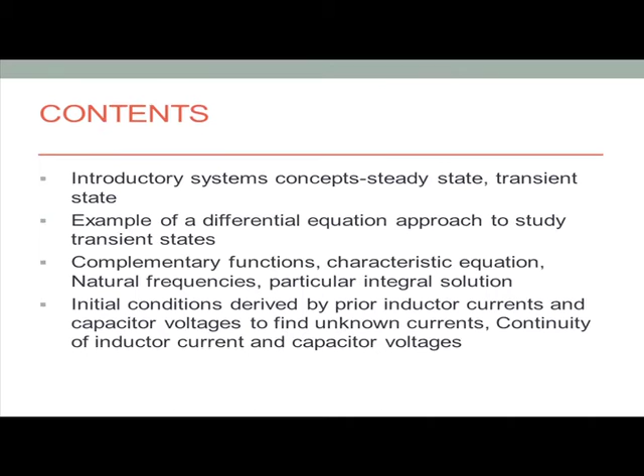After having familiarized ourselves with the different types of standard signals one has to deal with normally in system analysis, let us now introduce ourselves to some elementary system concepts which will be found useful later on in this course.

Generally, when we talk about the analysis of systems, we would like to assess the dynamic performance of the systems, and in this context it would be useful to remind ourselves what a steady state of a system means and what the transient state of a system means.

When the variables of a system or a network are either constant DC values or are regularly repeating periodic functions of time, then the system is said to be under steady state conditions.

Under sinusoidal circuit theory, you deal with systems under steady state conditions where all the voltages and currents are periodic functions of time which are sinusoidal in character. Similarly, in DC circuits you deal with steady state conditions when all the voltages and currents are constant.

So once again, the system is said to be under steady state when the signals characterizing the system are either constants or regular periodic functions of time.

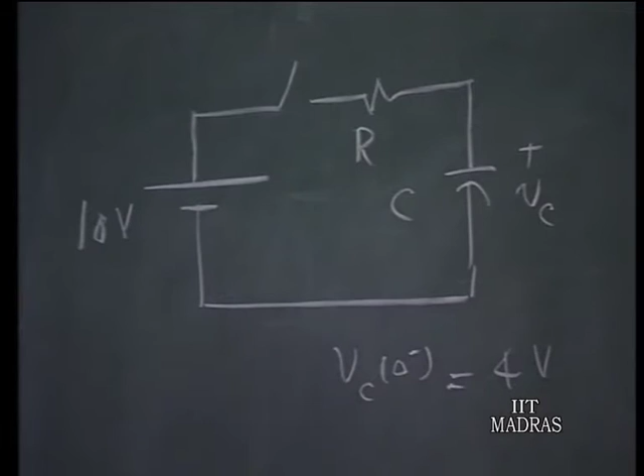Let me take an example to illustrate this idea. Suppose I have a 10 volts DC source connected to an RC circuit with an initial capacitor voltage of 4 volts, and I would like to find out how the capacitor voltage behaves for time t equals 0 onwards if the switch is closed at t equals 0.

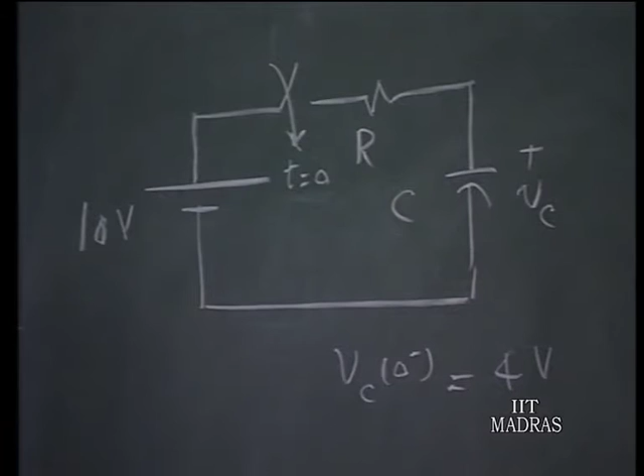Now, the capacitor voltage Vc to start with is 4 volts, ultimately it will reach a voltage of 10 volts, it gets charged to this 10 volts. Therefore, the steady state voltage of the capacitor is 10, that is the steady state voltage of the capacitor.

But at the time of closure of the switch, the capacitor voltage is 4 volts, and there is no reason for that voltage to change because there is a resistance here that absorbs any shock in between. This is 10 volts, this is 4 volts, and this 6 volts is dropped across the resistance. So initially the value of the capacitor voltage must remain as 4 volts.

Therefore, you have a transient term which is minus 6, and from your elementary knowledge of transient analysis there will be an exponential term e to the power of minus t over CR, which decays with time. Therefore, Vc of t is 10 minus 6 e to the power of minus t over CR. CR is the time constant of the circuit.

This is the steady state part, and this is the transient part.

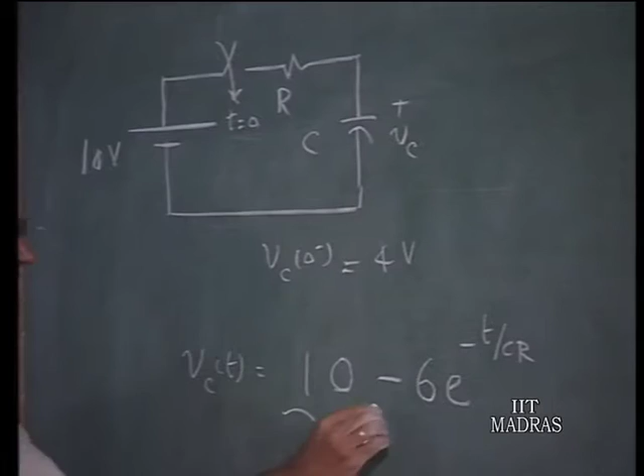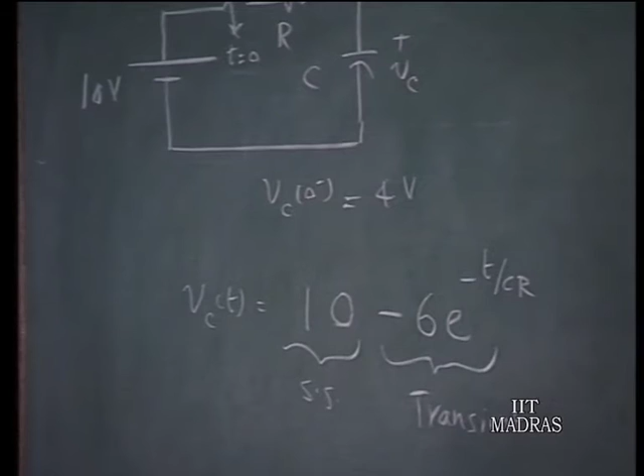So, in going from one steady state to another, from the 4 volt steady state to a 10 volt steady state, you have a transient arising. The capacitor voltage can be shown as this 10 volts, the new steady state Vc, originally it was 4 volts, and then you have a transient term which is an initial amplitude of minus 6 that decays like this. This is the transient component of the capacitor voltage.

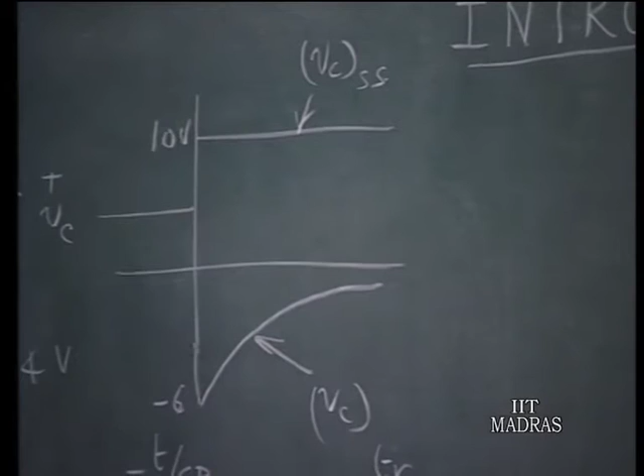The sum of these two will give rise to this curve. This is the actual capacitor voltage.

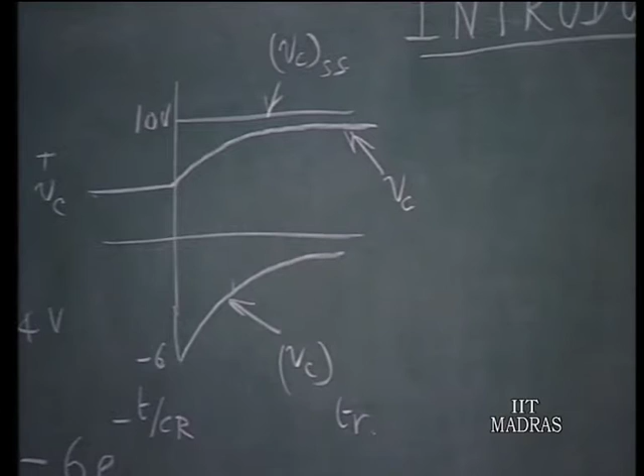So you recognize in this process a steady state value and the transient part, and the transient component arises because the old steady state does not match the new steady state, and therefore there is a transient which bridges this gap. In order to solve for these transients, you have different approaches available.

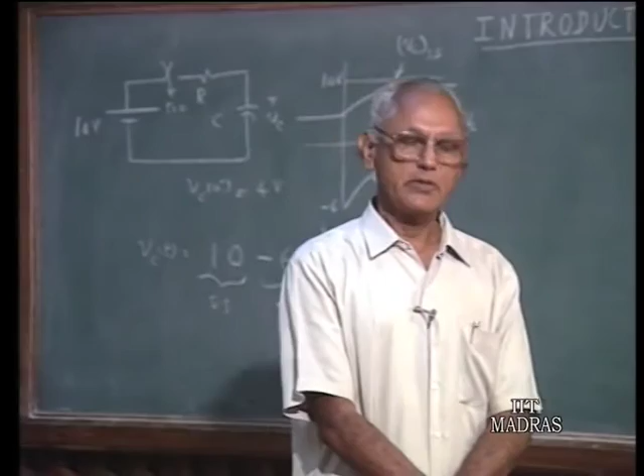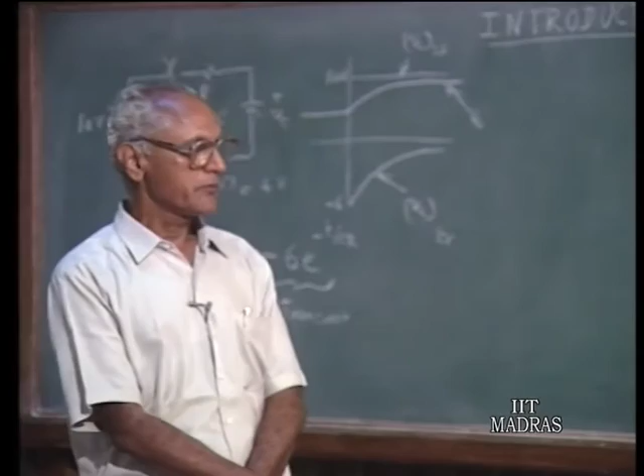The classical differential equation approach is the most fundamental method, but it is somewhat complicated. Nevertheless, since most of the equations of the network are written in terms of differential equations, it is a fundamental approach, and since you have studied differential equations in your mathematics courses, it would be convenient to see how this approach can be used to study transients in networks of this type.

We will illustrate and introduce this idea through an example, and later on show that some of the difficulties associated with solving transients through the differential equation approach can be overcome using operational methods like Laplace transform methods at a later point in the course. But to get a feel for the advantages of Laplace transforms, we must know what the difficulties are in the differential equation approach. So, let us take an example.

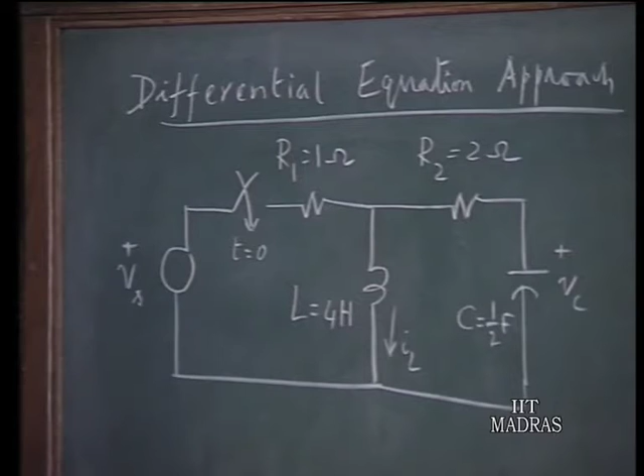Let us consider this particular circuit to illustrate the differential equation approach. We have an inductor and capacitor in the circuit, which provide the initial conditions necessary to solve the problem. Normally the initial conditions are given pertaining to the situation before closure of a switch. So let IL0 minus, before closure of the switch, be 0 amperes, and the capacitor voltage before closure of the switch is also 0.

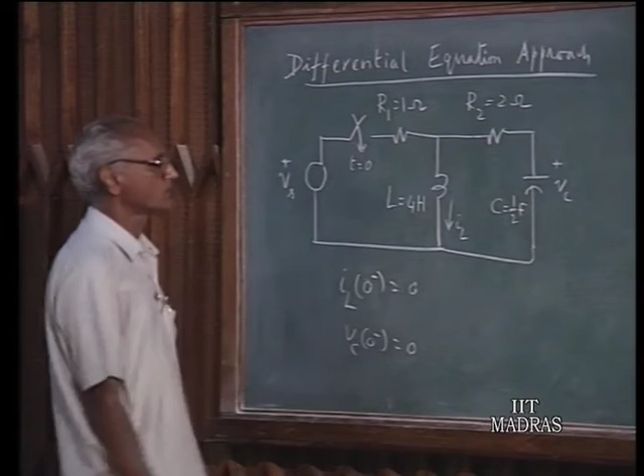And let us also say that the source voltage is 12 volts DC.

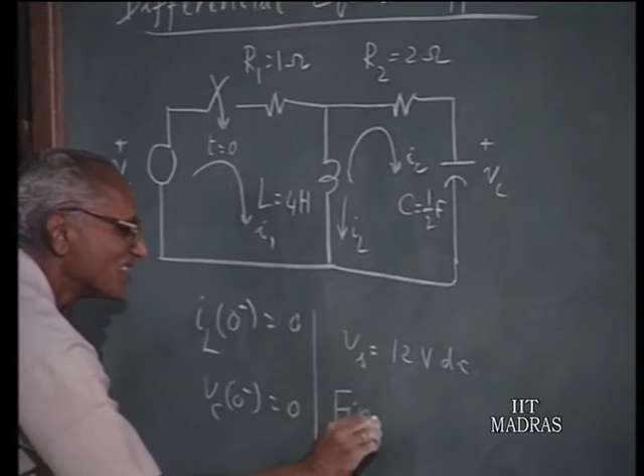To solve for this particular circuit, let us take the loop equation approach. We have two currents I1 and I2 in the two loops. We write down the differential equations pertaining to the two loop currents, and let us say that in this problem you are interested in finding I1 of t, for t greater than 0.

So this is the solution. Let me write down the differential equations for the two loops.

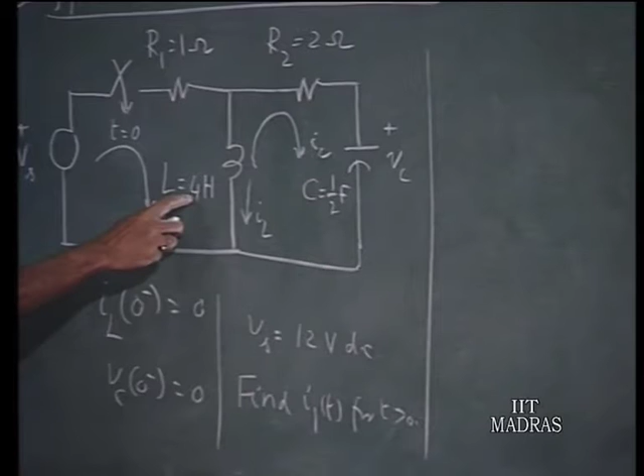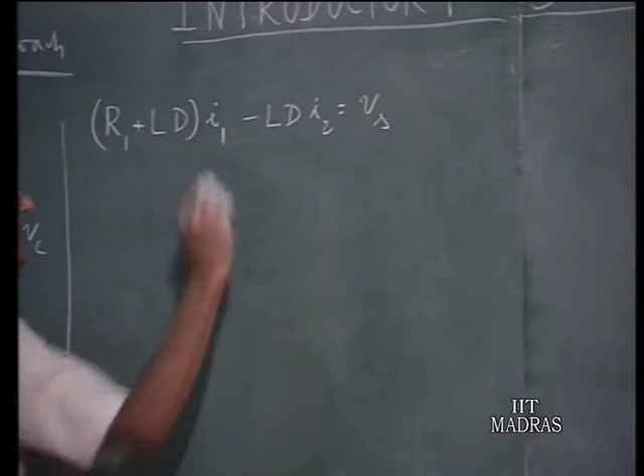For the first loop: R1 I1 plus L times d by dt of (I1 minus I2) must equal Vs. This can be written as (R1 plus LD) operating on I1, because the derivative operator D operating on I1 is di1 by dt, minus LD operating on I2 equals Vs. That is the first equation, where by definition D is d upon dt.

Similarly, D squared by definition is the second derivative of the particular quantity.

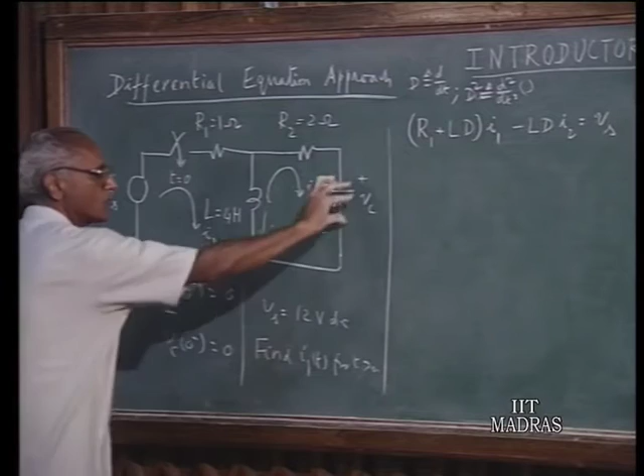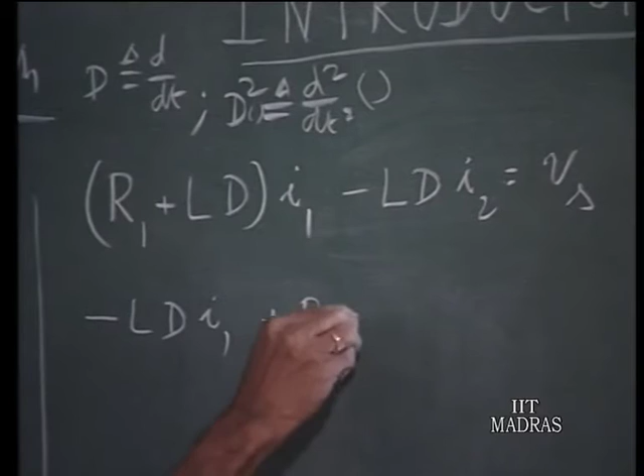Now for the second loop, suppose you take the voltage drops in the direction of loop current I2. You have R2 times I2, plus 1 over CD, that is the integral of current I2 divided by C, which is the voltage Vc, plus L times d by dt of (I2 minus I1), the voltage drop across the inductance in this direction. So if you write the respective terms, you get...

(R2 plus 1 over CD plus LD) operating on I2 equals 0, because this 1 over CD indicates the integral of I2 dt. 1 over CD times I2 means 1 over C integral of I2 dt, that is the voltage across the capacitor. So that is what we are having.

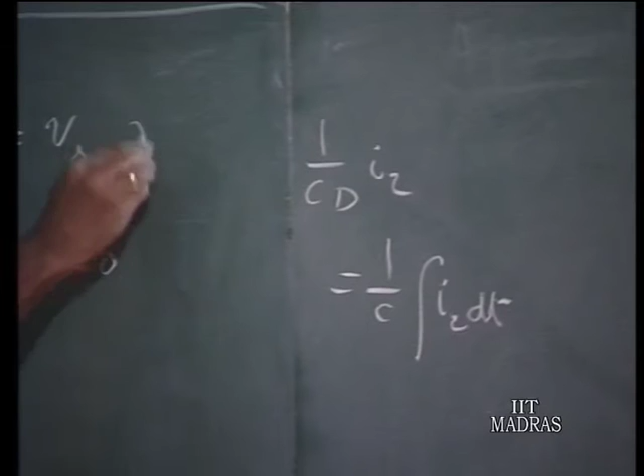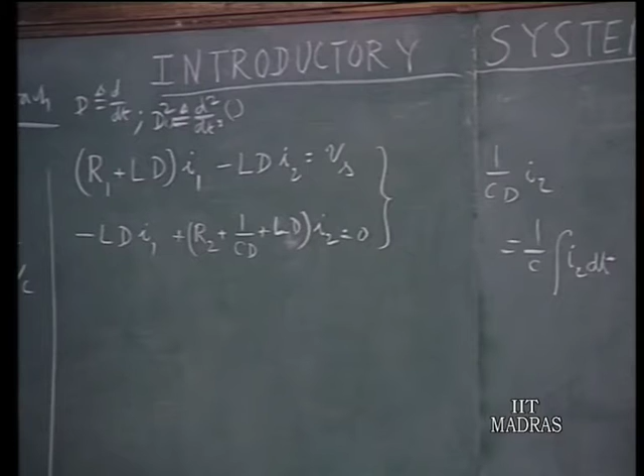Now we are interested in solving for I1, therefore we have to eliminate I2. If these were purely algebraic equations, we would multiply by suitable factors and eliminate I2. The same thing can be done here also, recognizing that these are derivative operator functions, but we can manipulate them in the same way as algebraic factors.

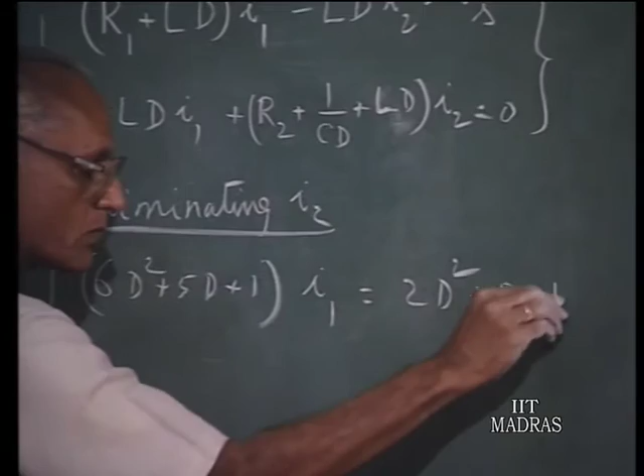So you multiply this factor by LD and this factor by (R2 plus 1 over CD plus LD) and eliminate I2 in the process. Substituting numerical values, for this particular circuit, eliminating I2, we get (6D squared plus 5D plus 1) operating on I1 equals (2D squared plus D plus 1) operating on Vs. This is the final differential equation connecting the source voltage and the response quantity I1 that you are interested in.

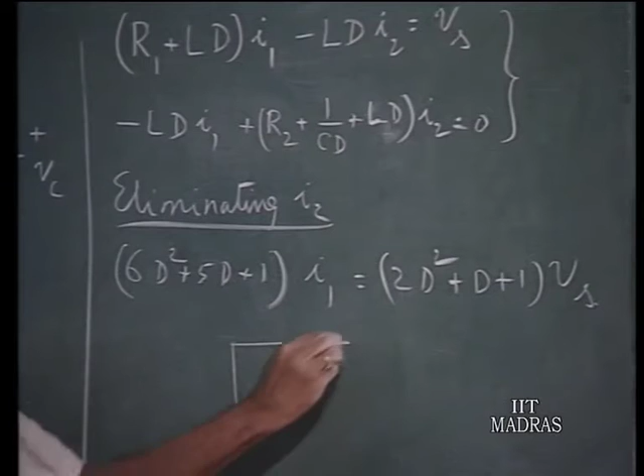In system representation, we can put this as an input quantity Vs and the desired output I1 represented in this fashion.

This is characteristic of the type of differential equation we will get in all these problems. So this can be put as an operator function F(D) operating on I1 equals another operator function G(D) operating on Vs, where this is the input and this is the output. The output and input are connected by differential operators of this type, F(D) operating on I1 equals G(D) operating on Vs. This is characteristic of all single input single output systems.

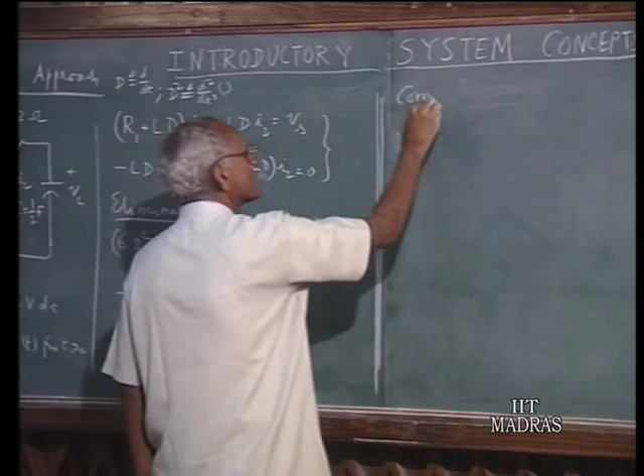For the solution of this, in the classical differential equation approach, it is done in two parts: the complementary function solution is part of the solution. So I1 complementary will consist of two terms depending upon the roots of the auxiliary equation.

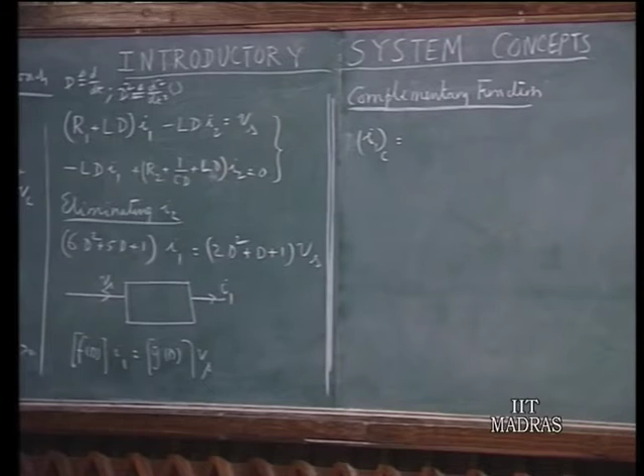So the auxiliary equation we have here is 6m squared plus 5m plus 1 equals 0. This comes from 6D squared plus 5D plus 1 equals 0; you substitute m for D, and this is what we get as the auxiliary equation. The solution for this will be m equals minus half and minus one-third.

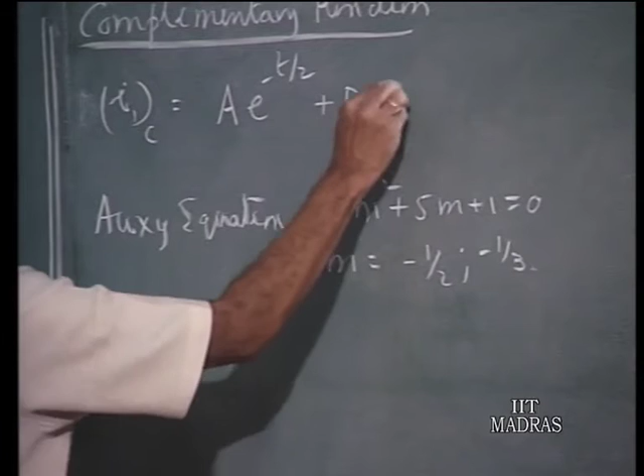So the complementary part of the solution will have an arbitrary constant A multiplied by e to the power of minus t by 2, plus another arbitrary constant B multiplied by e to the power of minus t by 3. This is the complementary part of the solution, which is familiar to you through your elementary courses on solution of differential equations.

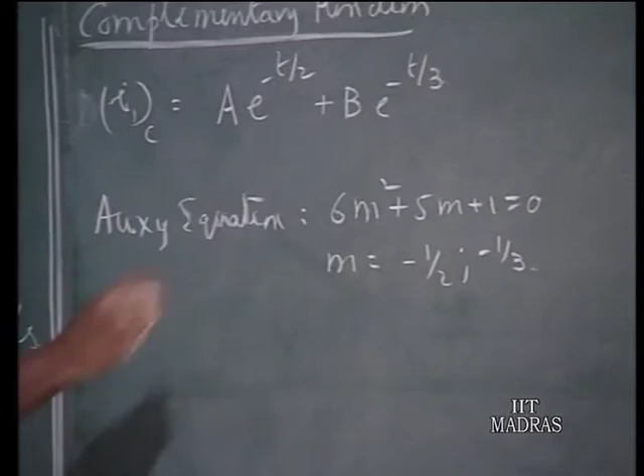Now we have something to say about this. This complementary solution, whatever you are getting, is also termed the force-free solution or the natural response of the system. Natural response.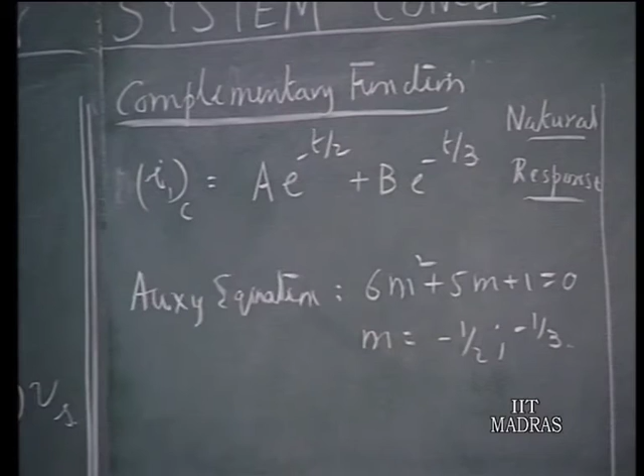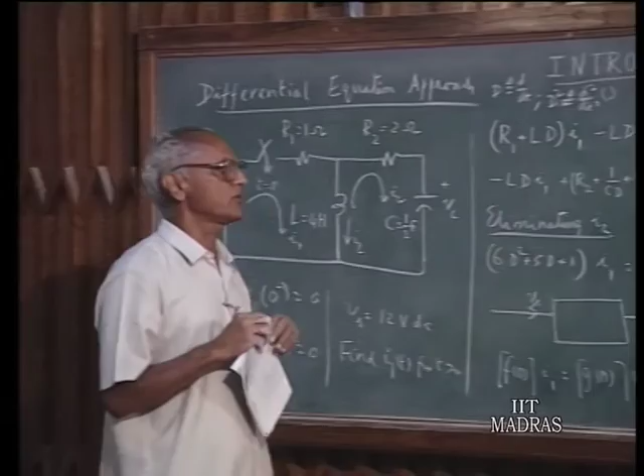Because this portion of the response, the characteristic of this response, this minus t by 2 and minus t by 3 will remain there no matter what source you take, what forcing function you take. Whatever forcing function you take, that portion will remain the same. Therefore, this is inherent to the system and this is the natural response, and this equation is called the characteristic equation.

Now, it is called the characteristic equation because of the fact that no matter what variable you wish to solve for in the circuit, whether you want to solve for I1 or I2 or the capacitor voltage or the inductor voltage, whatever you want to do, the characteristic equation will remain the same. You will get the same f of d no matter what you take as the response quantity, and so this is something which is characteristic to the system and is independent of the forcing function. That is why it is called characteristic equation.

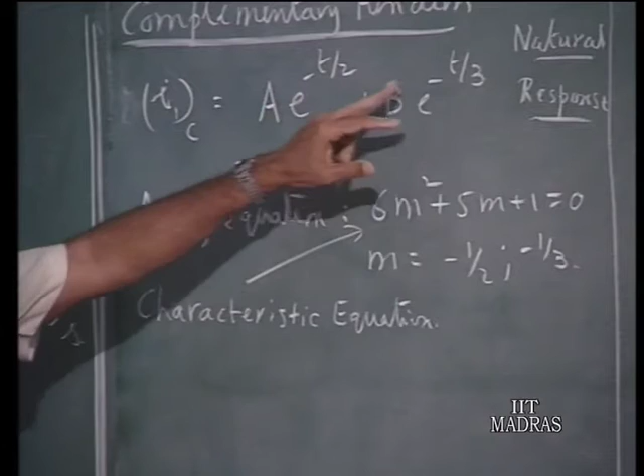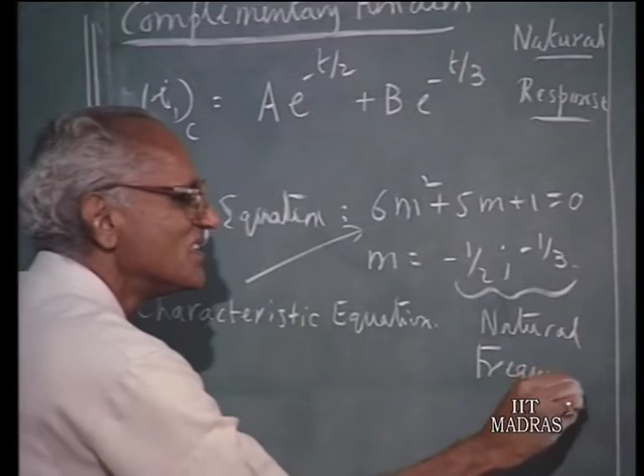And the roots of the characteristic equation are the natural frequencies. Minus half and minus 1/3 are the natural frequencies of the system. So, the complex frequencies present in this particular signal are minus half and minus 1/3. They happen to be real in this case, but in terms of the general concept of complex frequencies, these are the two values minus half and minus 1/3. They are the complex frequencies present in the system.

They are called the natural frequencies because they are inherent to the system and they arise irrespective of the forcing function that you are having. So, this is the complementary function solution which is obtained from solving the characteristic equation and auxiliary equation.

We have to of course solve for A and B because they are arbitrary constants, they depend upon the initial conditions. But before we proceed further, we need to have the particular integral solution.

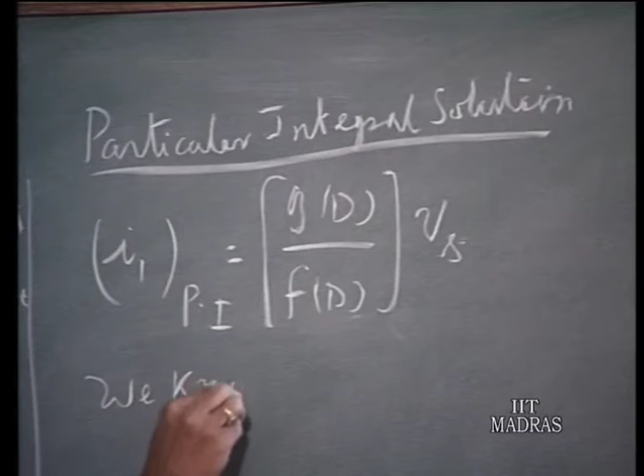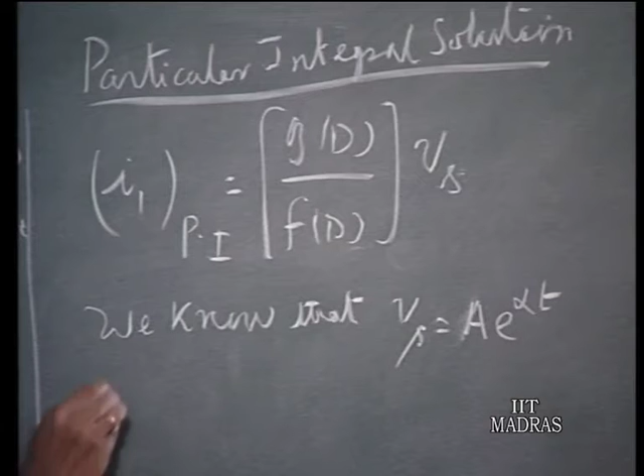The particular integral solution from your elementary study of differential equations will be obtained as g of d by f of d operating on the forcing function Vs. This is an operator function. We know that if Vs is of the form a e to the power of alpha t, then the particular integral solution is obtained as g of alpha divided by f of alpha, times a e to the power of alpha t. That is, the operator d is replaced by simply the factor alpha in the exponent. That is how it goes.

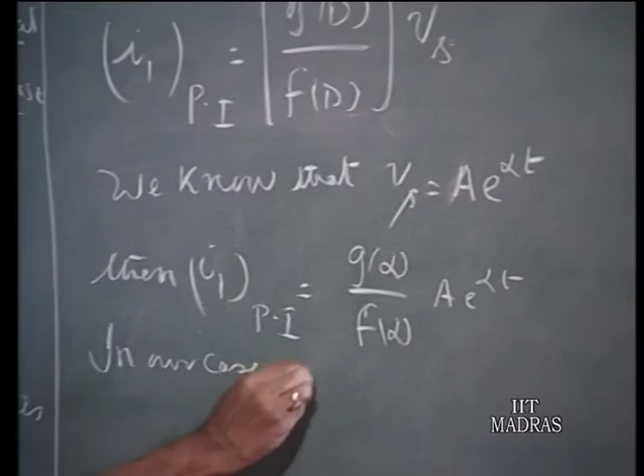Now, in our case, Vs equals 12 volts DC, therefore, we can take 12 e to the power of 0 times t, alpha is 0. Therefore, the particular integral solution, I1 particular integral solution, is G0 divided by F0 multiplied by 12. If you substitute d equals 0 in this equation, F0 is 1 and G0 is 1, therefore, this is 12. Particular integral solution is 12 volts, 12 amperes.

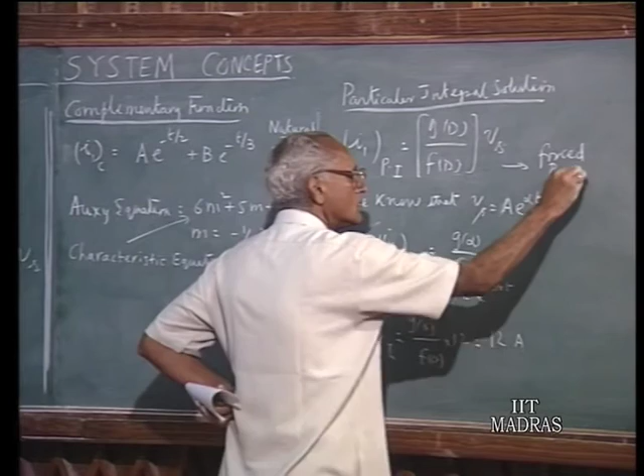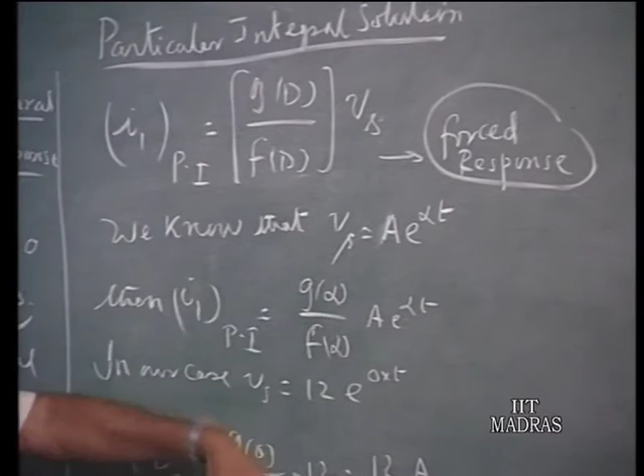Now, this is also called, whatever solution you get here, this is also called forced response, because this is the response which depends upon the particular input that you are having. This is the Vs forces this kind of response through the differential equation, and the complex frequencies present in the forced response will be exactly the complex frequencies that are present in Vs. If Vs has a single complex frequency alpha, the solution also will have that complex frequency alpha. If this has a complex frequency S, this will have a complex frequency S. If this has a variety of complex frequencies S1, S2, S3, S4, then I1 particular will also have all those complex frequencies.

So, the forced part of the solution has the same complex frequencies that are present in the input waveform, whereas the complementary solution will have complex frequencies which are inherent to the system, they are called the natural frequencies. Now, we have got the particular integral solution as well as the complementary function solution.

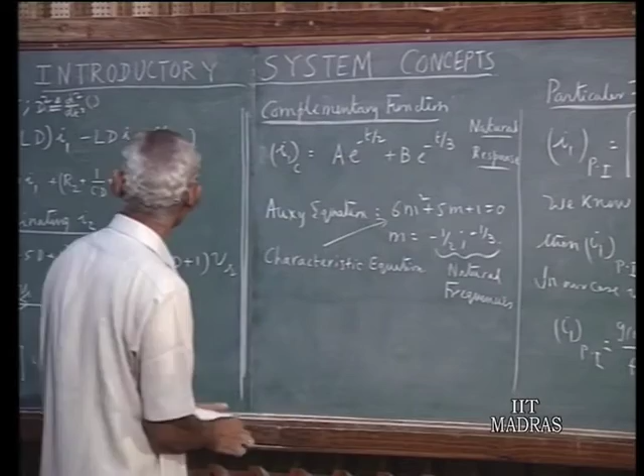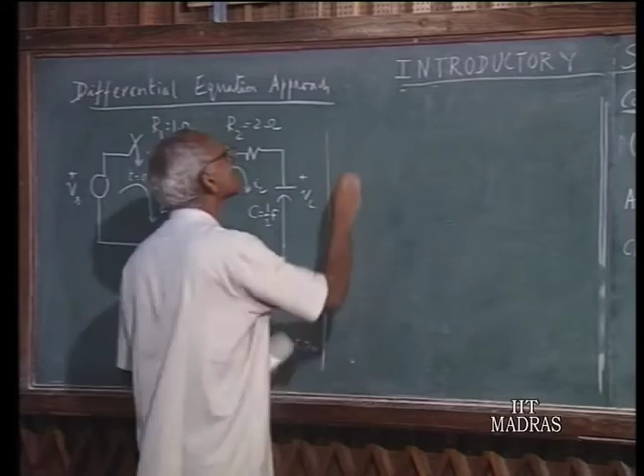So the total solution is I1 equals A e to the power of minus t upon 2 plus B e to the power of minus t upon 3 plus 12. This is the natural part, the natural response, this is the forced response.

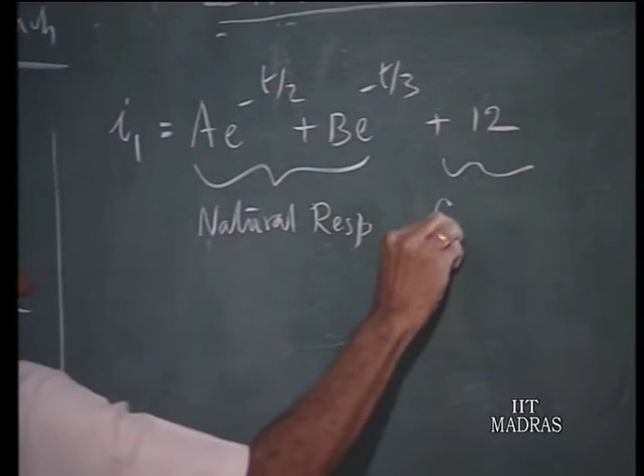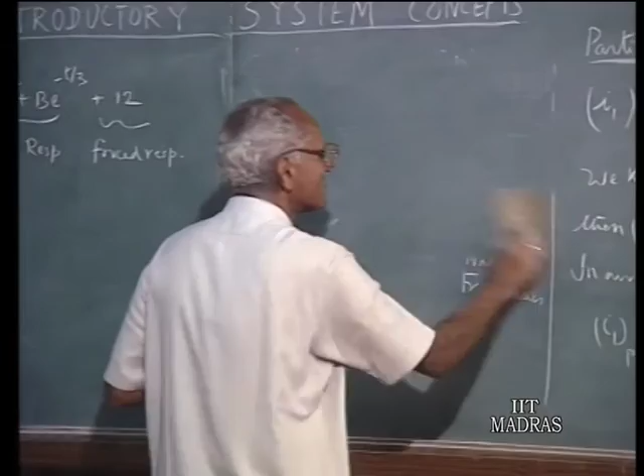Now that we have got the total solution, the form of the total solution, we have to evaluate these arbitrary constants A and B, and for that we need to know the initial conditions. From the initial conditions, we should be able to find out A and B. We need two conditions, so it is convenient in these situations to find out I1 at 0 plus and the derivative of I1 evaluated at 0 plus, di1 by dt evaluated at 0 plus. You can think of any two equivalent conditions, any two independent conditions, but these come naturally and they are convenient to calculate.

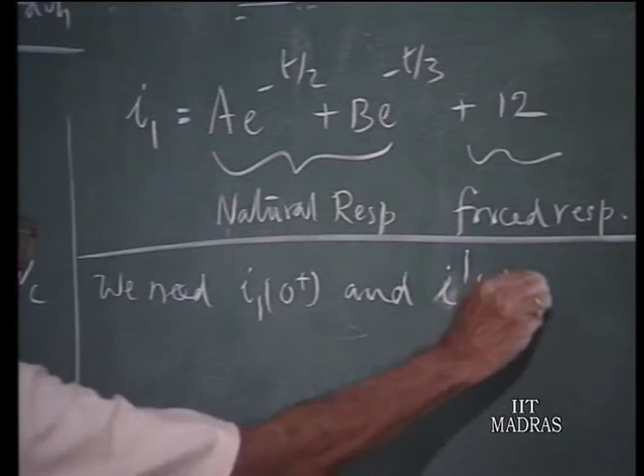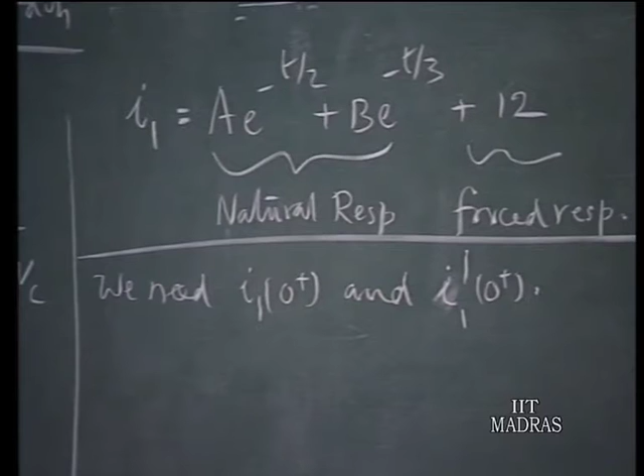I1(0+) and I1'(0+). Now, how do we go about it? It is the initial conditions of the reactive elements which provide a link between the situation before the switching operation and after the switching operation. They form the bridge between the conditions in the circuit before switching takes place and after. So, it is ultimately related to IL(0) and Vc(0).

We assume that Vc(0+) is the same as Vc(0-). Normally, the capacitor voltage is continuous unless there are impulse currents, which we will see later. Normally, we can assume this to be true, and there is no reason for the capacitor voltage to change suddenly as far as this circuit is concerned, and IL(0+) is the same as IL(0-).

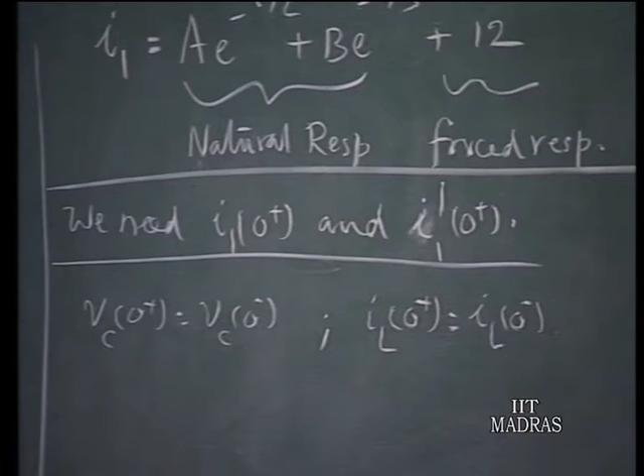So, we can say that Vc(0+) is also 0 volts, and IL(0+), which is really I1(0+) minus I2(0+), that is IL equals I1 minus I2, this is also 0. So, this is the information given to us, and from this information we should be able to manufacture the values of I1(0+) and I1'(0+). How do we do that?

Now let us see. At t equals 0 plus, you have this 12 volt source and you have R1 and R2. The current in the inductor is 0, therefore that is almost an open circuit, and the capacitor is a short circuit because the voltage across the capacitor is 0. So, you have R1 1 ohm, R2 2 ohms. So, the current I1 here is 12 divided by 1 plus 2, 3 ohms, therefore I1(0+) is 12 upon 3, that is 4 amperes. That is the initial value of the current, 12 upon 1 plus 2, 4 amperes.

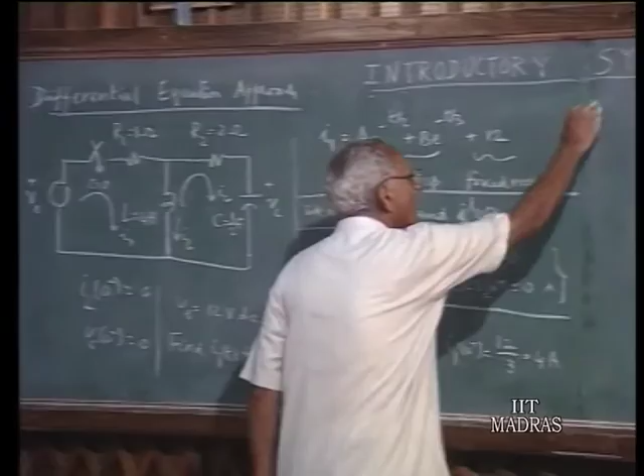Now, how about the derivative of the current at t equals 0 plus? Now, to do that we have to do some kind of manipulation. From this circuit we can see that Vs equals I1 R1 plus I2 R2 plus Vc. This voltage equals I1 R1 plus I2 R2 plus Vc for t greater than 0.

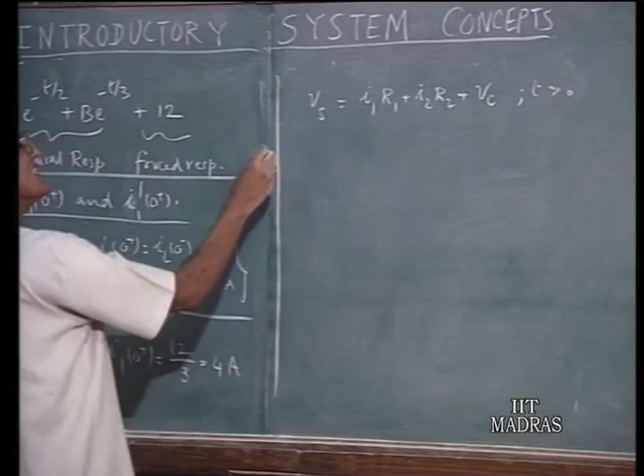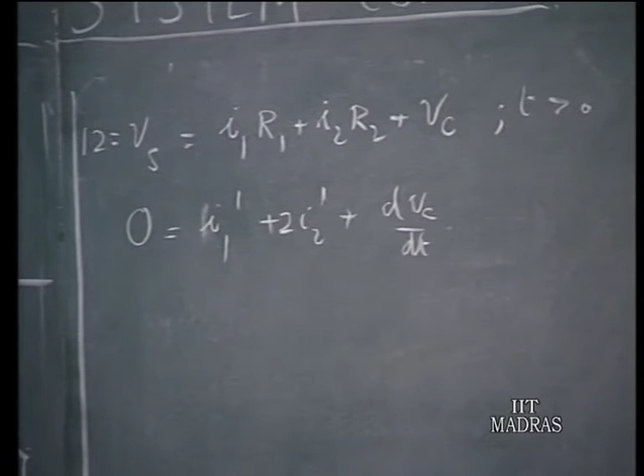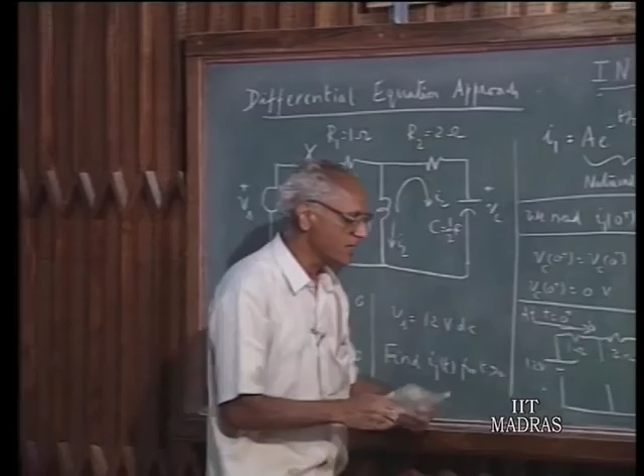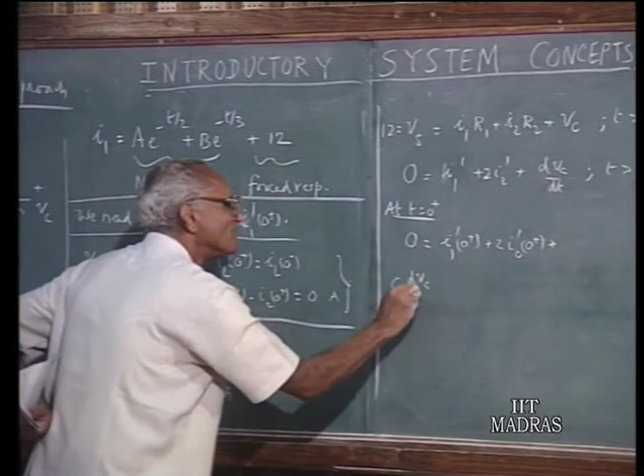At t equals 0 plus, this is 0, I1'(0+) plus 2 times I2'(0+), what is the value of dVc/dt at t equals 0 plus? The current in the circuit, current in C here at t equals 0 plus, is 4 amperes. So what does it mean? That C dVc/dt, that is the current in the circuit at t equals 0 plus, equals 4.

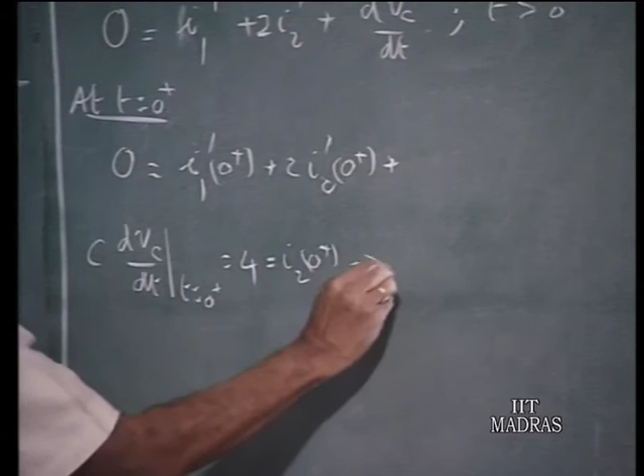This is I2(0+). I2(0+) is the same as I1(0+). From this we observe that dVc/dt at t equals 0 plus, dVc/dt is 0 plus 4 divided by half, which is equal to 8. C equals half a farad. So, C equals half a farad, therefore this is equal to 8 volts per second. Therefore, substitute dVc/dt by 8. So, this will lead me to a result: I1'(0+) plus 2 I2'(0+) equals minus 8.

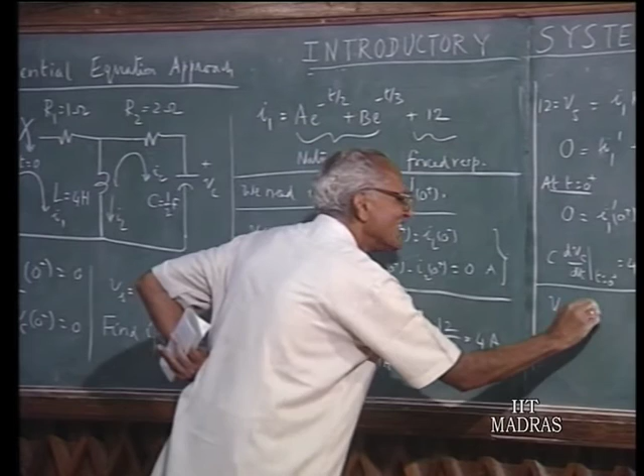Now we need to have another equation. This is not enough. Now we need another equation in I1(0+), I1'(0+), and I2'(0+). What is the voltage across the inductor? VL equals L times di1/dt minus di2/dt. That is what we are having.

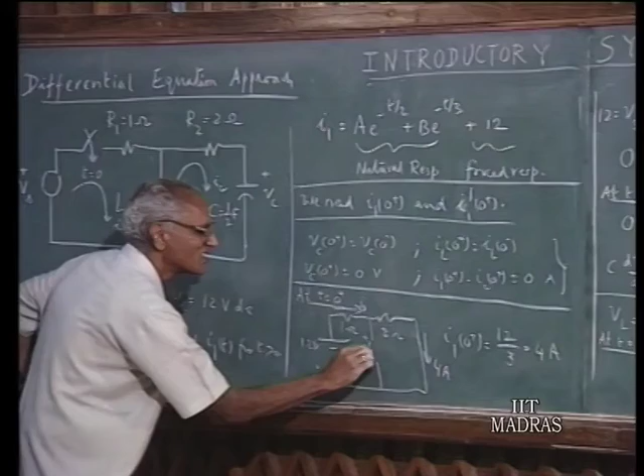At t equals 0 plus, what is the value of the voltage across the inductor? This is equal to VL(0+). What is the value of the voltage across the inductor at 0 plus? 2 ohms and a current I1 of 4 amperes, therefore 8 volts, the capacitor voltage is 0. So, at t equals 0 plus, this is 8 volts.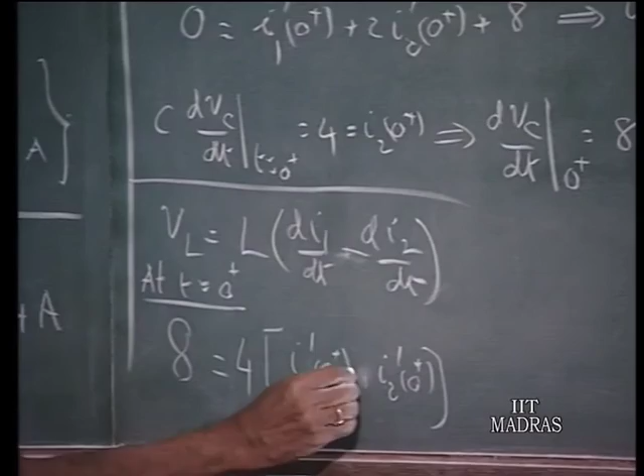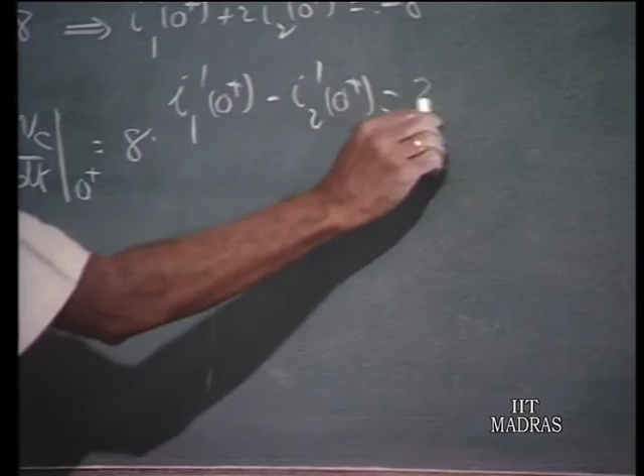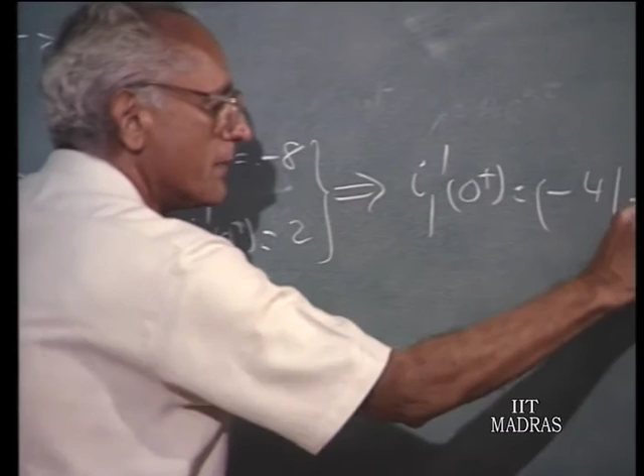One is I1'(0+) plus 2 I2'(0+) is minus 8. The other equation says I1'(0+) minus I2'(0+) is 2, and the solution for this, from these two you get I1'(0+) as minus 4 upon 3 amperes per second. So, you have I1(0+) is 4 amperes, I1'(0+) is minus 4 by 3 amperes per second.

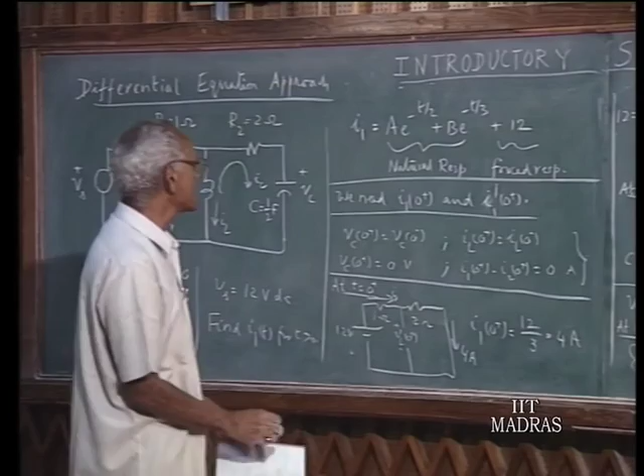So, you use this information to solve for A and B. So, to solve for A and B, we use I1(0+) equals 4 amperes and I1'(0+) equals minus 4 by 3 amperes per second.

You substitute these values in this expression straight away, take the derivative of this, and then put t equals 0 plus and substitute this value. You solve for A and B, and you will get a solution.

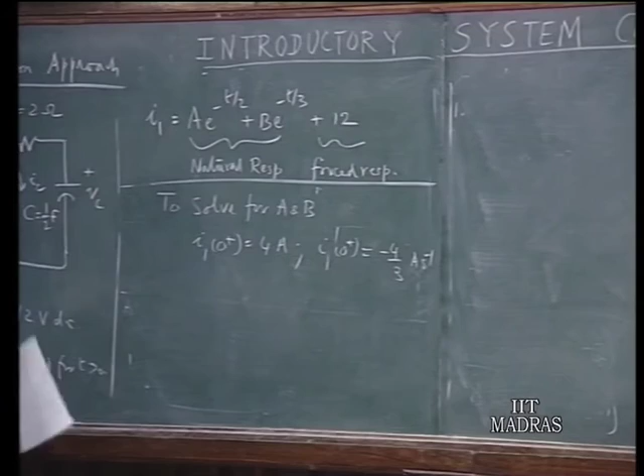A equals 24, B equals minus 32, and finally you get the solution as I1 of t equals 24 e to the power of minus t upon 2, minus 32 e to the power of minus t upon 3, plus 12. This solution is valid for t greater than 0. That is the final solution.

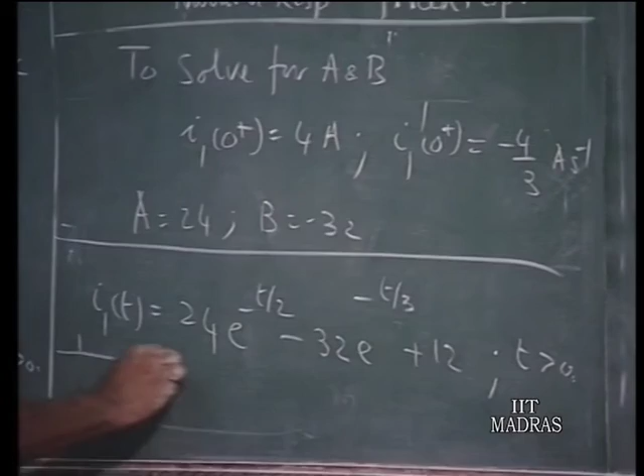So let us see what we can gather through this example. In the differential equation approach, you have two parts of the solution: the complementary part of the solution and the particular integral part of the solution.

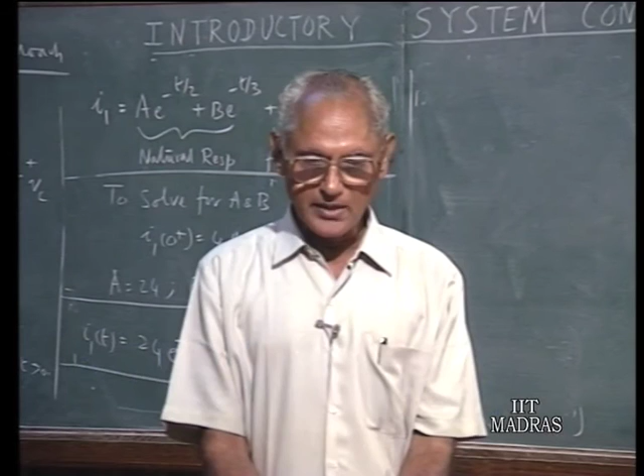The complementary part of the solution is obtained through the solution of the auxiliary equation, also called the characteristic equation. This characteristic equation is independent of the particular response quantity you are choosing; it depends upon the system as such, its composition and various elements. The frequencies present in the complementary solution are termed the natural frequencies.

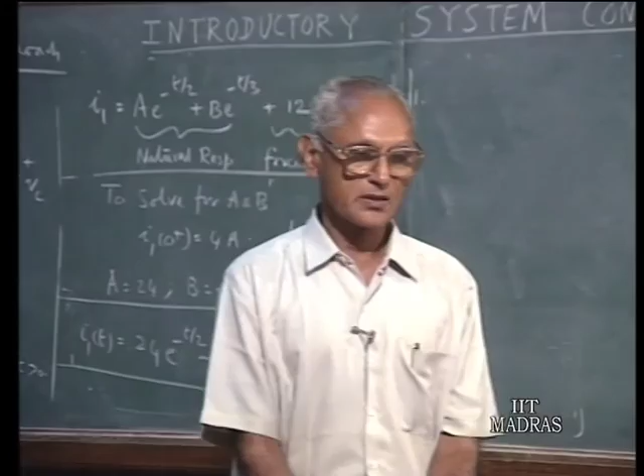They are in general complex. In our particular case it may have been real, but in general complex. These complex frequencies present in the source-free response of the complementary solution are called the natural frequencies. This is characteristic of the system; it does not depend upon the particular forcing function.

On the other hand, the particular integral solution is called the forced response part of the solution, and it has all the frequencies present in the excitation or input function. The sum of these will be the total solution.

In solving for this we need information about the initial conditions of the quantity we are solving for. In mathematics, generally when you solve the differential equation, these initial conditions for the region of interest are given to you, but in problems of this type we do not have those initial conditions given straight away on a platter.

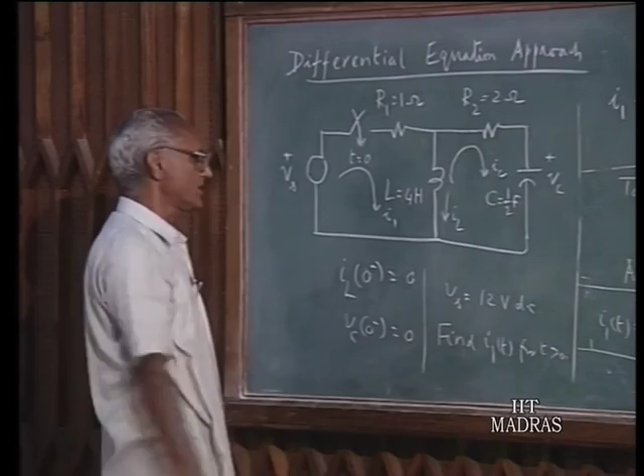What you are given is, in a circuit like this, some initial conditions pertaining to the regime before the switching operation. From this you must find out the new initial conditions appropriate to t equals 0 plus for the particular quantity you are interested in, whereas the initial conditions are given in terms of the capacitor voltage and inductor currents.

So this requires a lot of manipulation, as we have seen, and this is really one of the troublesome aspects of the classical differential equation approach to solving these problems. Imagine if you have an nth order differential equation—here luckily we have only two reactive elements.

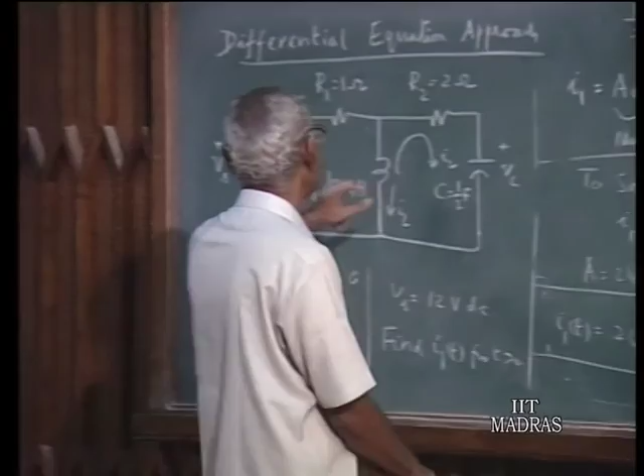Suppose you have got 5 reactive elements, the differential equation would have been of 5th order, and you need to have 5 initial conditions pertaining to any quantity you have to solve for, not only the initial value but the first 4 derivatives. Even for the first derivative we had so much trouble. You can imagine the trouble we would have finding the initial value of the 5th derivative. So this is really a problem.

So in the classical solution you need to find out the initial conditions appropriate to the particular quantity you want to solve for, and this requires a considerable amount of manipulation.

In this particular example, we assumed the capacitor voltages and inductor currents are continuous, which is normally the case, but there may arise situations where the capacitor voltages have to jump from one value to another, from 0 minus to 0 plus, and similarly the inductor currents may have to jump from 0 minus value to 0 plus value.

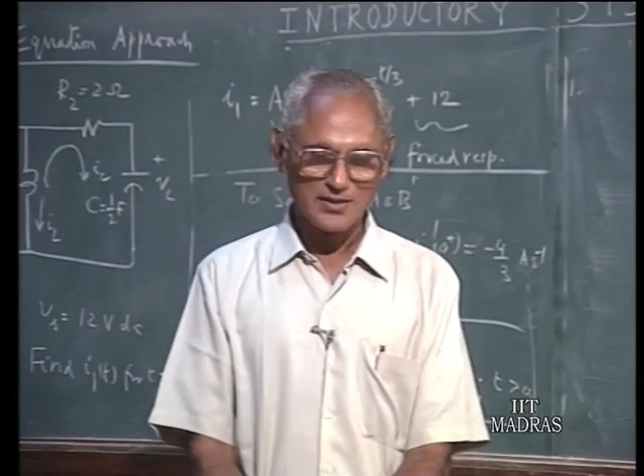As we have seen in an example, when a battery is connected to an uncharged capacitor, immediately the voltage has to jump, and an impulse current has to exist. So in evaluating the initial conditions, it may not always be necessary that Vc(0 minus) equals Vc(0 plus), and IL(0 minus) may not necessarily equal IL(0 plus). Such cases also merit our attention.

In the next lecture we will take an example or two of where such special initial conditions occur, and then continue with our discussion of some of the elementary concepts needed for the analysis of systems, which we will make use of in our later work.